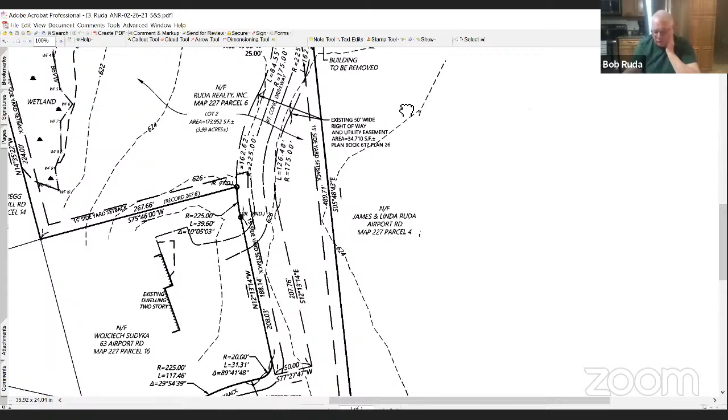Wasn't there some more property for the open space subdivision that would have been attached to this down at the lower bottom, Bill? Yeah, there's some adjoining land currently owned by my brother and his wife, and we have an agreement to transfer this into Legacy Landing if and when we get a purchase offer. Oh, okay, that's on the advice of our lawyer. He said don't make any moves until you're pretty sure it's gonna sell.

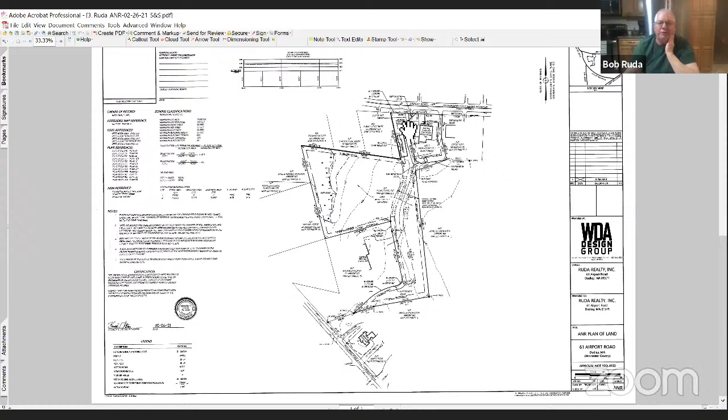Okay, where's the frontage for lot two? The frontage is, here Steve, about 100 feet. Next to, I'm sorry, three, Bill, how many feet are there? 73.02 plus 29.94 is 102 some odd feet.

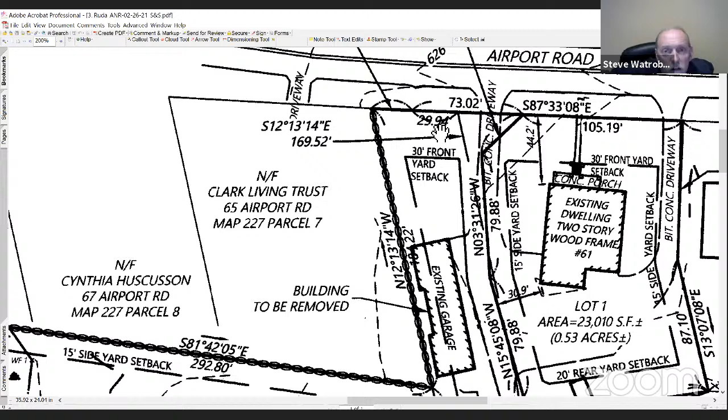Okay, and that's res 15 over there? It says on the plan, yes, I believe so. I had the same problem with that frontage. It's just the way the engineers put it, yes, res 15, you have to add the two. So it has 100 feet, which is the required minimum.

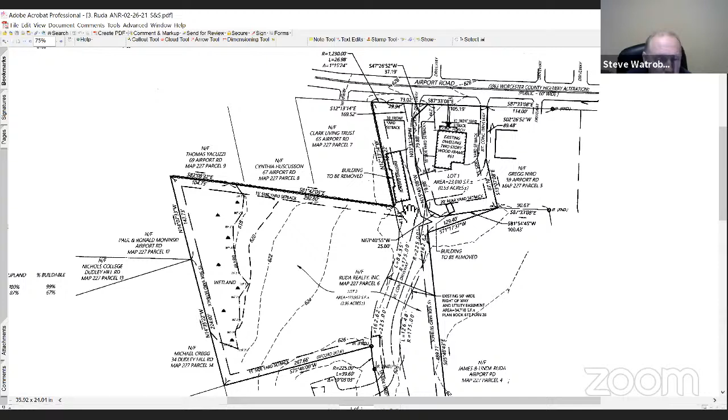So Steve, where that land is, where the existing garage is shown, if the subdivision ends up getting done, you're basically taking that garage down because the road's going to come right through there, right? That's correct. Okay, all right.

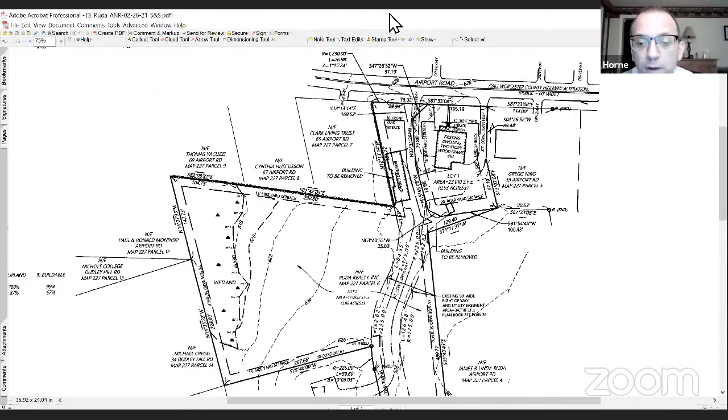If there are no further questions, can I get a motion to accept? Mr. Chairman, I'll make a motion that we accept the plan of land, ANR plan of land for it's Ruda Realty, Inc.

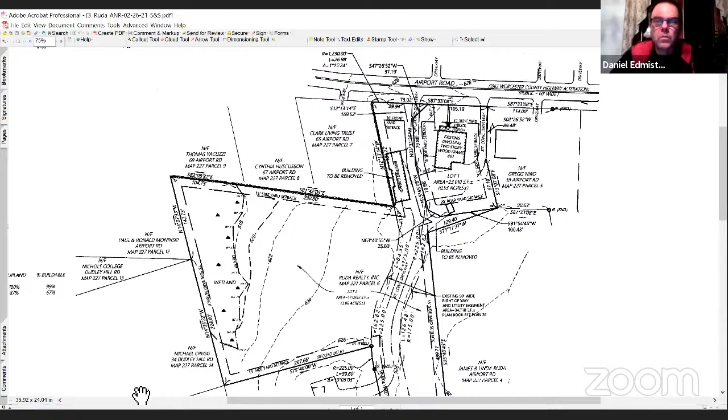All right, I have a motion to accept the ANR plan as shown from Ruda Realty, Inc. Do I have a second? Second. I have a motion and a second. All those in favor will do a roll call.

So 3 approved, 1 how do you say that? 1 is abstain. Abstention? Easy for you to say. It's too late for this stuff.

So Dan, all right, thank you so much. Michelle, leave the ANR Mylar and the copies in the police lobby for the board to come down and sign. And then when that's done, Michelle can notify Mr. Ruda that the plan is ready to be picked up.

I will. We only have to sign the Mylar. Is there something else we have to sign as well? 3 paper copies. Okay, we'll take care of that.

Who will be signing that, Bill? No, Richard. Michelle, will you put that in the lobby tomorrow? Absolutely. Okay, thank you. Thank you, ladies and gentlemen.

Yep, no problem. Thank you. Good night. Good night.

All right, moving right along. We have item B, discussion of the Complete Streets program. Is that on, do we have a guest for that as well?

There we go. Yes. Hi, Gemma. Hi, nice to be back. I have a PowerPoint to share if you're able to give me the opportunity to do that. Sure, one sec. And I also have 2 of my colleagues here, Robert Raymond and... oh, sorry. Okay, Gemma, you are now the host.

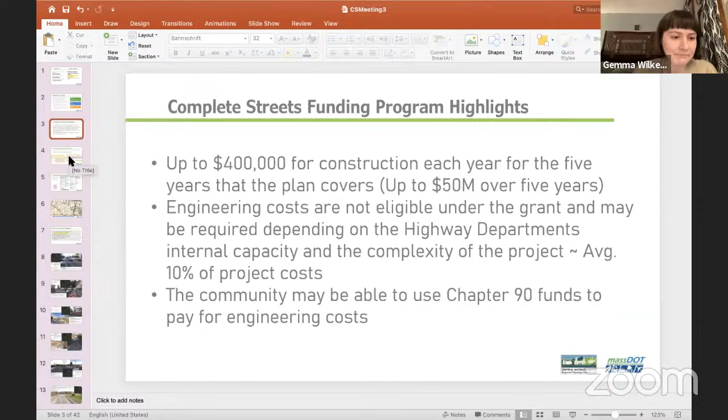You've ranked the project in terms of priority to the town. You've given it a name, a quick description, and this description can include things like 'if feasible,' right? So there might be some projects in town that you're not really sure about - you really do need to have an engineer look at it and understand what your options are.

What I'm thinking of in particular is that spot in front of the graveyard where you've got that really high elevation sidewalk. You can certainly include that in your plan and have that be something you'd like to improve as part of this grant, and it fits with what the grant can fund, but you might have to put it into your plan as 'if feasible, we'll do something like this.'

The next piece is the geography. You guys on your last meeting had talked about coming up with projects, and I guarantee you that those 5 projects will be broken down into many, many more, because breaking them down into smaller bite-sized pieces gives you more flexibility each year when you go to apply, so you can pull in the projects that make sense. Maybe you have some underground work or resurfacing going on, and you want to pair that with those Complete Streets projects - you'd be able to do that more easily by breaking the projects out a little bit.

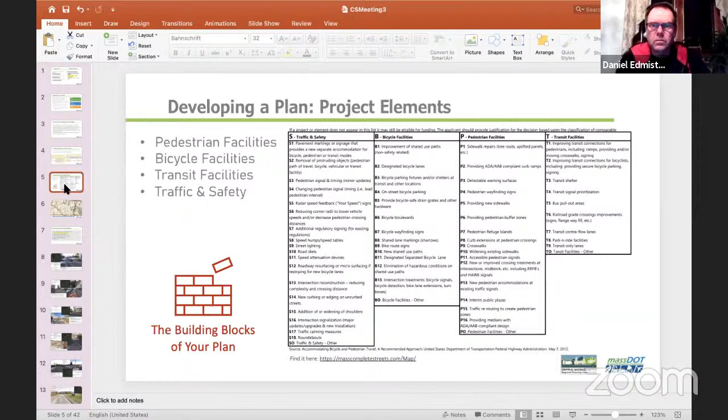So these were the areas that I focused on, 4 corners to the high school. And I believe this was the areas you had talked about in your last meeting. Does that match up with what you guys had in mind?

I would say so. The high school to Mason Road, 4 corners to the high school, 4 corners. I'm trying to figure out which of these would cover that area in front of the cemetery. I think that was one of our concerns. Is that the first one, 4 corners to the high school? So that's 4 corners at Center Road, Dudley Oxford Road, and Dudley Hill Road? Yes, exactly. Okay, all right.

So yeah, there's quite a lot of slides here. I'm going to just show you them, make a few remarks, and then give you some chance to talk about your thoughts.

So this is the first one, that's that intersection there. This is the section that I'm talking about as I walk you through. You can see the end of the sidewalk that's in front of Nichols College here in the green. There's one ramp there, which does have a detectable warning pad, so it's in pretty good condition. And then you've kind of got nothing.

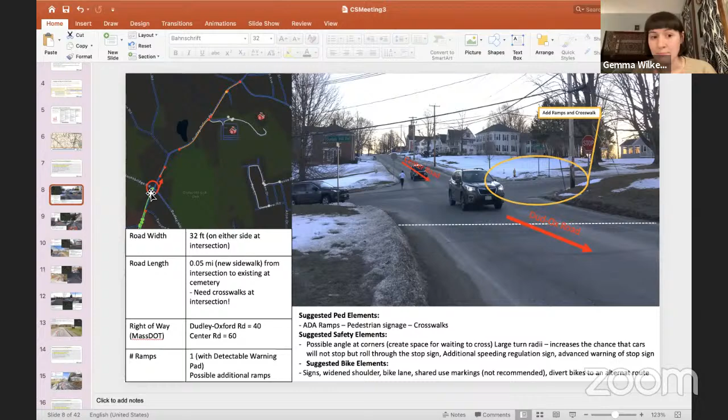And I think one of the things you would have to think about is where the crossing point would be. Because I'll just skip down to the graveyard, which is actually the next slide. So this is the graveyard, where there's this kind of problematic sidewalk here.

One of the things you could think about doing is actually getting rid of the sidewalk on the graveyard side altogether and moving it to the other side of the road. And it is a pretty narrow road there. So this is the right of way that MassDOT has on file, so there is some room to go into the right of way there. Anytime you go into the right of way, there's conversations you have to have with the community, and sometimes they're totally on board and sometimes not. So that's always something to consider whenever you do that.

But there might be an opportunity on the other side of the road here. Actually, I wish I had a little bit better of a picture. Oh, there you go. On the other side of the road there, to put a sidewalk instead of this side. So that kind of goes back to... If I may, I'm going to interrupt again, I apologize.

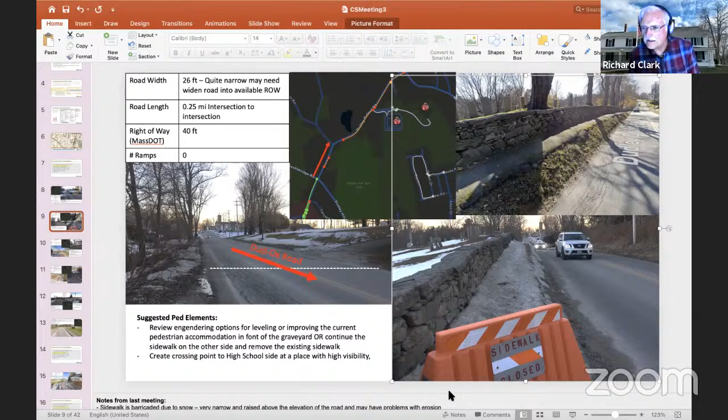I think it's fortunate that we have Michelle with us. As I understand it, Michelle, when the trees here were taken down, there was a plan to do something, hiring a landscape architect, and rehabilitating that area. Did that include the sidewalks? At this point, we spoke to a landscape architect who will be doing a plan of the cemetery only, not the sidewalk, just the cemetery and beyond the stone wall. So it does not include the sidewalk that I'm aware of, unless he's going to incorporate that. Given the fact that there's a cemetery with a number of graves, honestly, if anyone were looking to access it, having a sidewalk there seems like a reasonable thing to do.

So there's a couple of things to think about here. Do you want to work with an engineer to make the sidewalk work on the side where the graveyard is? Or do you want to work around that and put a sidewalk on the other side of the road? That's also a workable solution.

The other component is where the crossing point is. The sidewalk is on the Nichols College side here, and then it goes to the side of the road the high school is on. So at some point there needs to be a place where pedestrians can safely cross from one side to the other. If you have that crossing point at Four Corners, you'd have the sidewalk on the side with the graveyard. If the crossing point is further down, you could potentially have the sidewalk on the other side, away from the graveyard.

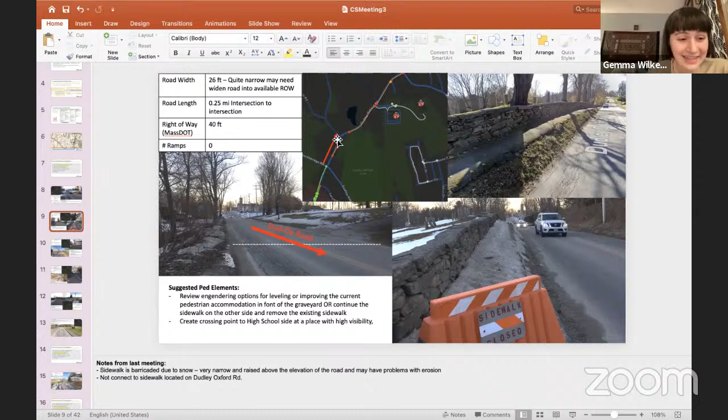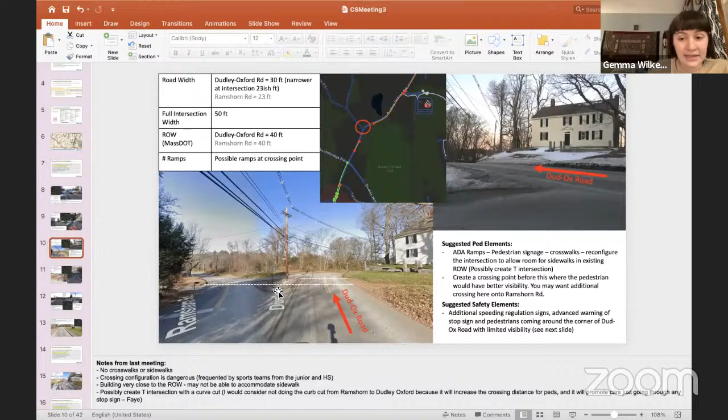What I wouldn't necessarily recommend—well, if you were to put a crossing point at this intersection here, the next one with that little island, you'd definitely want to think about visibility. Coming around that corner from the high school, this corner here, you go right into that intersection with pretty much no visibility until you're already in there.

But there is definitely a stop sign there—you have to come to a stop right there. Is it a three-way stop? Yeah, that's a three-way stop at that intersection.

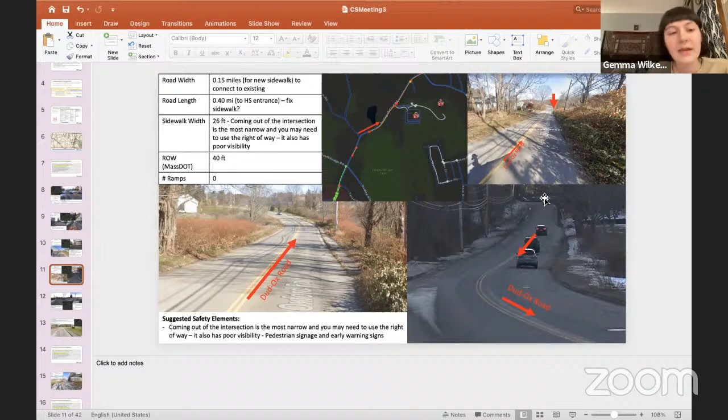I didn't notice that, sorry. But to Gemma's point, I think she's spot on—that intersection is funky, with some elevation issues, and visibility is restricted. The Four Corners intersection is much better visually for anybody driving, in terms of pedestrian crossing or attempting to cross.

I disagree with the idea of trying to fix that pathetic sidewalk in front of the cemetery. That photo she showed shows how narrow it is. I don't see how you widen that into a substantial sidewalk without undercutting into the stone wall, which I'm sure nobody wants messed with. That would be a major problem—that's why the elevation is so crazy the way it is now. It's because nobody wanted to dig down and destabilize the stone wall. Whereas on the other side of the street, there's nothing there.

The alternative then would be to leave it as is because it's too fragile to do anything with, or take it out completely, like she said. Take it out and do what—level it? No, seed it, let grass grow there. There's already vegetation growing down to the road right there, and that's falling apart anyway. Oh, it definitely is. I have a feeling if you talked to an engineer, they'd say there are some real erosion issues here.

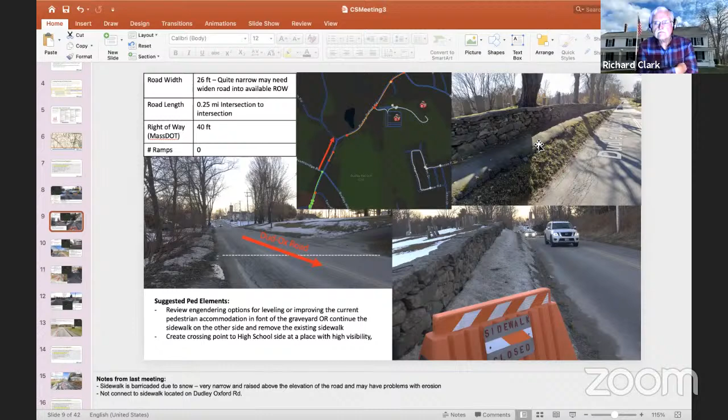So yes, I don't know if that is what you want to go with, if you want to kind of write it up in the plan as something that you would consider, the crossing point, and consider where you would place that sidewalk, depending on how likely it is to salvage this. Does that make the most sense to you guys? Okay, let me just go back because I clicked ahead a little bit and make sure I didn't miss anything.

The other thing I'll say about the crossing point is, you might not want to put it right at the corner there in front of the stop sign if you push the crossing point further down. You might want to put it a little bit further up than where I am here, so that you have a little bit more visibility of the cars coming around the corner. So that would be another thing to think about.

But the other thing with this piece of the road, this I would say is your biggest challenge in terms of connecting these pieces of sidewalk. And I know you had said the probable reason why they don't have sidewalk here is because the road is so very narrow. At this intersection, you have about 30 feet in width, and a little bit, 23 feet, at the narrowest point.

What I would think about with this intersection is that there's an opportunity to actually do a little bit of reconfiguring, because even though at this point you've got 23 feet, you've actually got about 50 feet all the way across here. So there might be an opportunity, for example, to turn this into a T-shaped intersection, or there might be an opportunity to narrow or reconfigure the structure of that island to be able to afford a sidewalk without even moving into the available right-of-way.

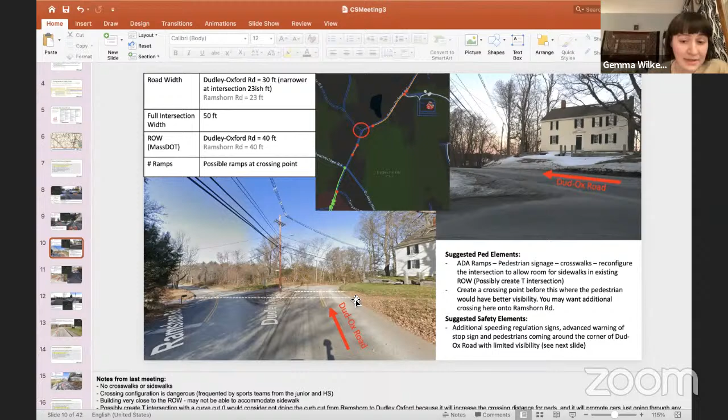So I'll show you the next piece there, because you guys had talked about this being the narrowest, but I actually think this next piece is even a little bit narrower. So up in this top corner here, it's a very small segment that gets quite narrow.

And just where this arrow is, you've got a sidewalk already, so everything from there and beyond would just be a sidewalk repair. The road gets quite wide as you move towards the school, but right here it's quite narrow. I'm not sure what this property is here, I couldn't really tell, it's the back of the golf course.

But on either side here, this would be a place you'd probably have to look at if you wanted to put a sidewalk in, expanding the width of the road into the available right-of-way. That's probably one spot you'd have to consider, given how narrow the road is. Although, you could work with an engineer and they might provide a bit more insight if there are other feasible options, but I'd imagine that would be tricky without going at least somewhat on either side into the available right-of-way.

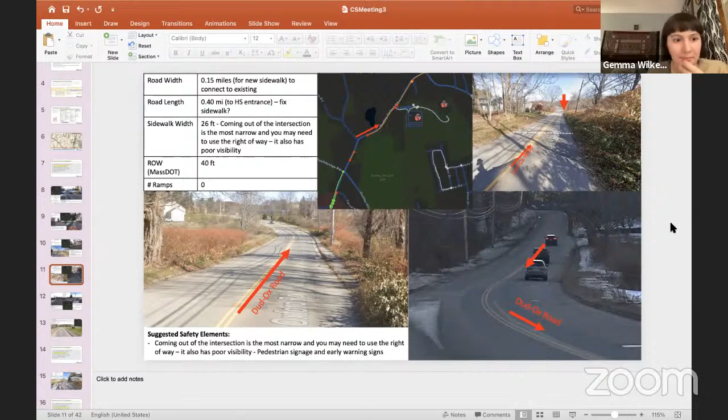A little further down the road, you can see how wide it's gotten here. You might even want to think, in places like this which are in a school zone, that these very wide roads are probably going to kind of encourage speeding. There might be opportunities to narrow the lanes here, improve things, even include a bike lane leading up to the school. If you're having kids funneling into the school, a little more amenities for bikes here, narrowing these lanes a bit, but ultimately the main thing would be to improve the sidewalk, make sure there's ramps where they're needed. So I wonder if there are any thoughts about this particular area.

I kind of like the idea in terms of the bike lane. Now, there are lights there as you approach the school entrance that flash during school hours, at dismissal or when kids are coming in, and I think it supposedly drops the speed limit down to 20. I don't think anybody, except in the mornings pre-pandemic when parents were dropping kids off, went through there at 20 miles an hour. But it was a pleasant thought in any event. Most people are going through at the continuation of the 40 or 35 they'll be approaching that area in.

It occurred to me that if we were able to widen the road, as you continue down coming towards Dudley, towards Charlton Street, and then Pierpont isn't too far down the road, you're coming into some of the more scenic areas in town. A bike path from Nichols going towards Oxford, taking a left perhaps towards Pierpont - one of the few scenic roads in town is Hadden Pond Road, up in that direction. If I were biking in Dudley and I weren't concerned about being run over by somebody doing 40 miles over the speed limit, that might be an area I would go. There are a couple of swans that have taken up residence in one of those ponds - it's an open area, part of the more scenic part of town. I suspect a bike lane might work there.

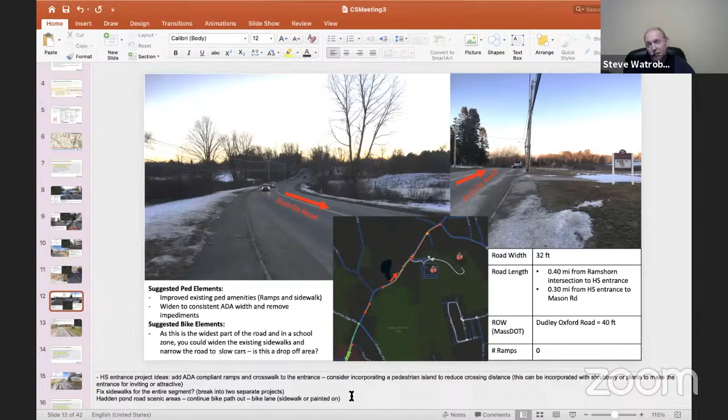So I don't think there's much here, but I did remember one thing. This is just at the school. One thing I would definitely look at is a crosswalk crossing over the entrance to the school and ramps on either side of that.

Another thing you could think about is putting a pedestrian refuge in the middle there. Basically you extend the island out and create a midway point, making it safer, especially for students, to cross one segment and then the other. But at minimum, you definitely want sidewalk improvements, a crosswalk, and ramps.

And then thinking about the bike path, you might want the bike path to continue up into the school as well, and maybe even some bike racks at the school or something like that.

Yep, that sounds good. Okay, beautiful. All right, so this is the next piece. Well, I'm not speaking for the whole board, I just want to make that clear. Oh sorry, I didn't mean to move on too quick, but if you don't hear feedback from the rest of us, just drive on. We're doing good.

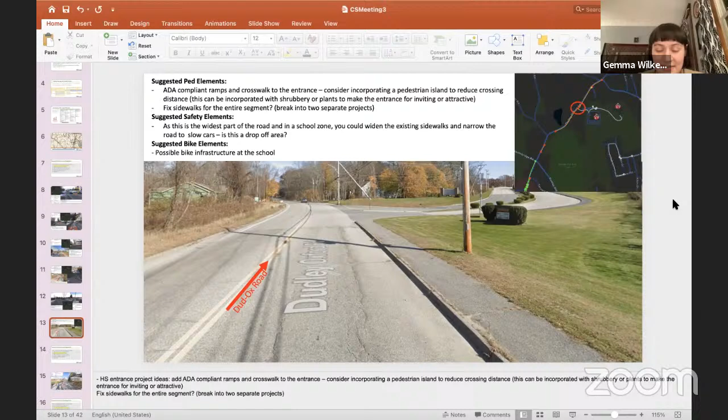Anything? Sorry, please slow me down if you need to. The next segment is the high school to Mason Road. It's a pretty small segment. There is sidewalk down the entirety of it.

The road is fairly wide on most of this. The sidewalk could use a little bit of an upgrade. I think there are 3 ramps that are currently not ramps that could have ADA ramps installed, which would make things a lot safer.

But there's not a whole lot here. I would say you could probably continue the bike path up this road. So right off the bat, I'd definitely do sidewalk improvements, ramps, and then potentially continue the bike lane up there — it looks like there'd be enough room to do that.

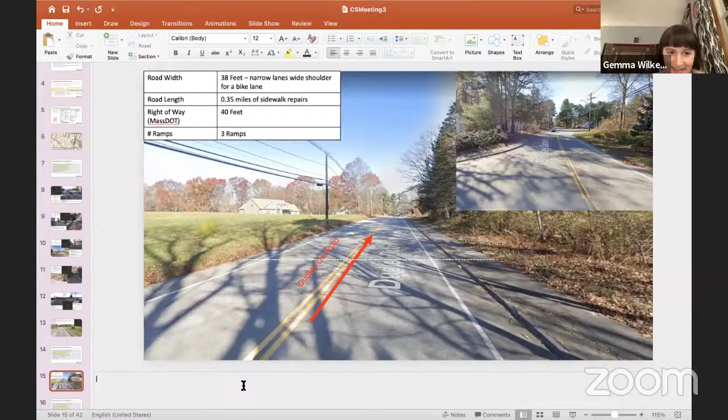All right, I'm hearing silence, so I'm thinking that sounds okay to all of you. I don't want to be the one to go 'oh yeah, sure, great' constantly. But yeah, the bike path — I was saying you've got to have it go somewhere.

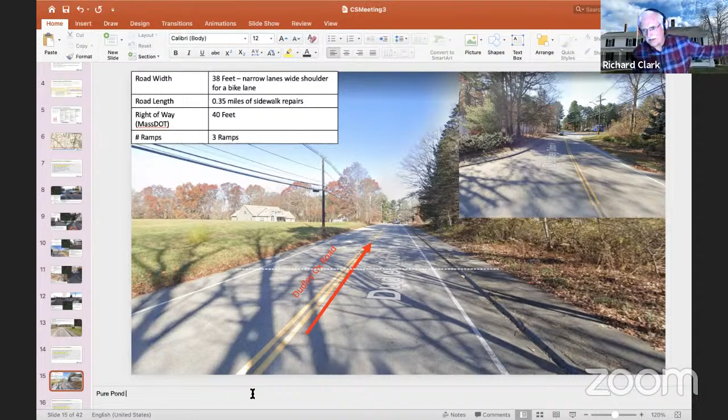Right, and I think Richard was mentioning that once you continue down this road, you start getting into that more scenic area with the ponds and everything, so it would be a great place to ride. Then further down, if you take the left, Pierpont is a very wide roadway, and that goes out toward another scenic road in town, Hadden Pond Road. You'd be maintaining something reasonably interesting for someone riding a bike, as opposed to just dodging traffic.

Would you be interested in adding that as a project element, including a potential bike lane going down? Did you say it was Pierpont Road? Pierpont is actually a conservation area on one side, about 3.5 acres. P-I-E-R-P-O-N-T, isn't it? Yes. There you go, exactly, Faye. Thank you — and that's a pretty straight stretch too, as a matter of fact.

Okay, so maybe I'll put that in as a project, but a little further down on your priority list — something you'd have in your arsenal. So that's all I had for that section.

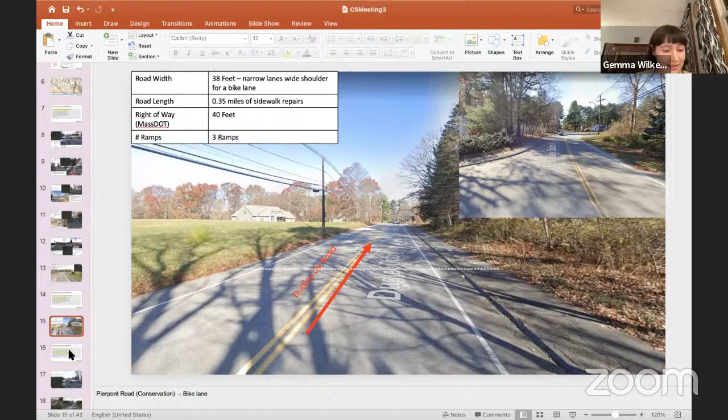It's pretty straightforward. The next section you talked about was Four Corners to the Park and Shop. Starting at Four Corners, similar to what we discussed: going down Dudley Hill Road, whichever side you decide to put the sidewalk on, you'd want a ramp as well as a crosswalk bringing you onto that side of the road.

If this was your crossing point, you'd probably have an L-shaped crosswalk with sidewalk going down this way and sidewalk going down that way, or a crosswalk going from here to here with sidewalk, and here to here with sidewalk. Trying to think if there's another configuration — I think there might be one other, but Gemma...

Could you back up to that list, the priority list, just for a second? Yeah.

I'm wondering from the board members, is anybody else thinking that number 4 should be moved to number 3, that those two should be flipped?

The reason why I say that is because I'm thinking about the number of houses you'd have the sidewalk go in front of. If you went from the end of Mason Road to Mason Road School, the population density down there is all Res 15. The houses are one right after the other. There aren't too many areas left on Mason Road where you have stretches without houses on at least one side of the road continuously, and in many cases both sides.

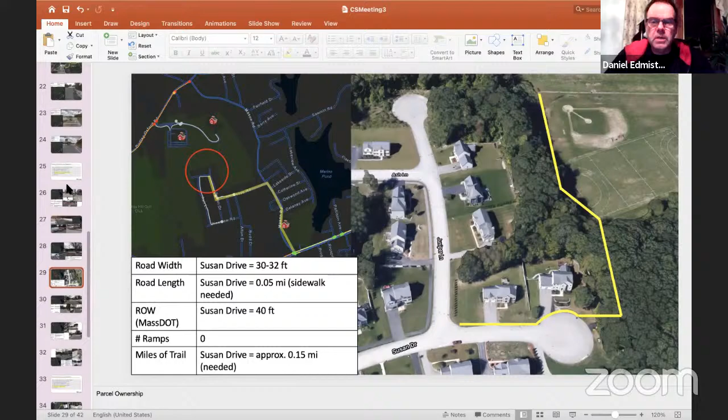But again, there's a lot going on here, and these would be good items to discuss with an engineer to try to figure out costs and what would be the easiest to do. We also have to think about time—if we can get good bang for the buck in the first couple of years, reaching a certain percentage of people, and then go from there, that might be a nice aspect of it.

But do we have a consensus with the board members as far as flipping 4 and 3 priority-wise? Well, I'm against it. I don't know what everybody else thinks—Guy, Richard, what do you guys think?

If I can make a quick suggestion, one thing you could possibly do is break this section down—I'm going to be breaking these sections into even smaller projects, right?

So this number 3 is going to be like 4 or 5 different smaller projects broken down. You could think of this as 2 sections: the upper part of Airport Road and the lower part of Airport Road. You could prioritize the lower part, from that path the students take to the park and ride, first. Then Mason Road Elementary School, and underneath that, the upper part, if that makes sense.

Dan, your opposition to the Mason Road, if I understand you correctly, is you just think it's too difficult to do because of how narrow it is in spots. Is that my understanding? No, my opposition is I just think Airport Road is, first of all, going to be easier. Second, it's going to be facilitating Nichols College to the park and ride. And third, it gets us more completed areas in a quicker period of time.

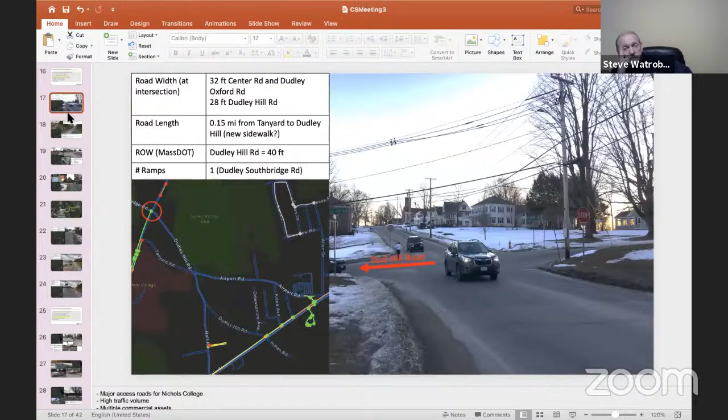All right, I just have to get resituated. Okay, this is probably the narrowest part, in the upper part of the road. You probably would have to go somewhat into the right of way here if you wanted to do a sidewalk there.

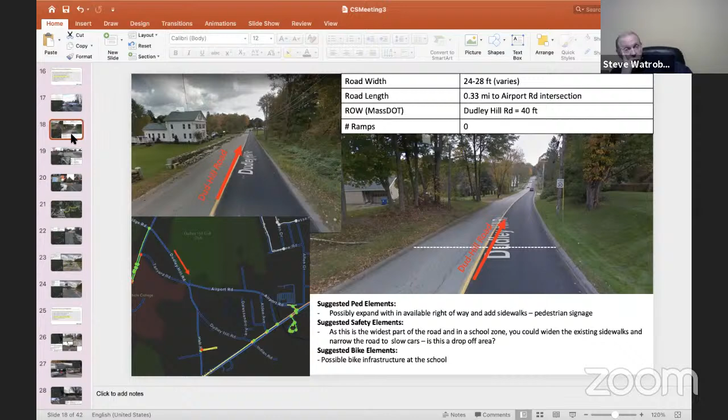And then this is that intersection, where things get a little interesting again, because you guys mentioned this is a pretty hazardous intersection. I definitely got that impression when I was out there walking around. This is where Nichols College students come out to walk to the parking lot, so there definitely are folks walking around here, based on the tracks in the snow and mud, which was helpful in some ways—we don't usually do this in the snow, but it was helpful.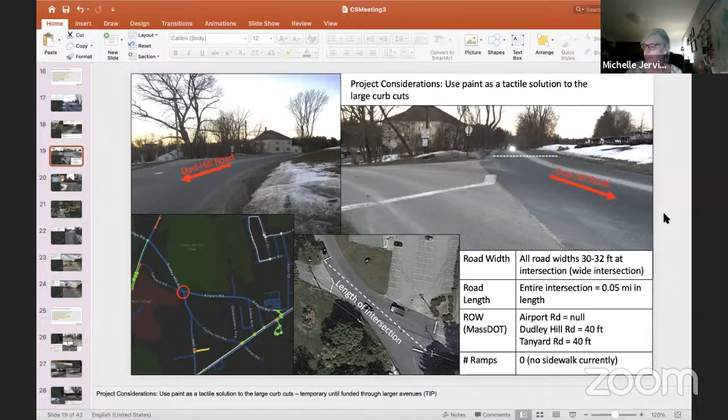One of what I would put in for a project element here is looking at the reconstruction: how can you reconstruct this intersection to be a little bit safer? So these are some of the ideas that me and Faye had talked about. Potentially there's a number of different ways you could think about reconfiguring this. The theme of the day is that you'd want to consult with your highway department or an engineer.

But one way that is kind of very common is to actually turn, instead of having this X shape, you turn it into sort of one road with two T-shaped intersections. So instead of having it be an X, you actually have a road with a sharp turn here. They'd have to stop and then turn onto the road as if it was a typical T-shaped intersection, and then another T-shaped intersection there. You could achieve that by basically bumping out this piece of land here.

A more affordable way of doing that, rather than actually creating a new segment of grass, might be to do something like this, where you're just using, especially in a place that's not right in your downtown, you're not necessarily needing to create these big pedestrian spaces to congregate. You're creating some kind of markings, and maybe using some more low-cost options to delineate that space. But basically looking at how you can reconfigure it, include some additional signage to make it a little bit safer, and also be able to fit the sidewalks in there. So any thoughts about that?

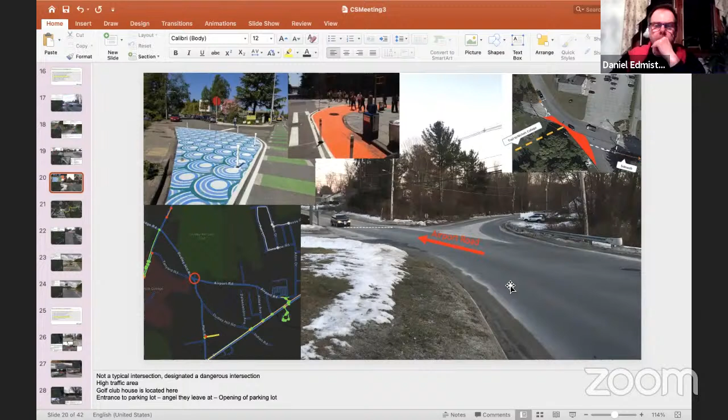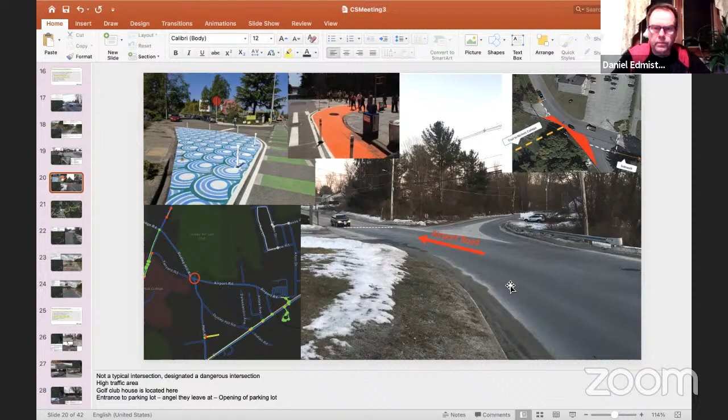One of the things is we had a town in North Brookfield, they had a grocery store that had two entrances. One was an in and one was an out, and they really wanted to swap which one was an in and which one was an out. That wasn't really something they could mandate, it's kind of something they need to work with the grocery store on. But we still included it in the plan, because it's kind of all-encompassing of what you think is ideal, and it's something you can work on when you eventually go to do that project. So I would say it's worthwhile to include in there that you would want to, if feasible, narrow that opening, and maybe add additional signage or something like that.

I wonder what you guys think about the idea of using these sort of more low-cost solutions to basically make it more clear to cars that they have to take a sharp corner, right? They can't just come around the corner, fly around the corner, but you're creating a T-shaped intersection. They actually really have to come to the corner and stop. It's not going to be the same as a T-shaped intersection on any other street, but using some of these more low-cost solutions to create that effect could provide some traffic calming.

I think it's a good idea. It's definitely low cost, and looks a little better than Jersey barriers. Yeah, anything that slows traffic down is good.

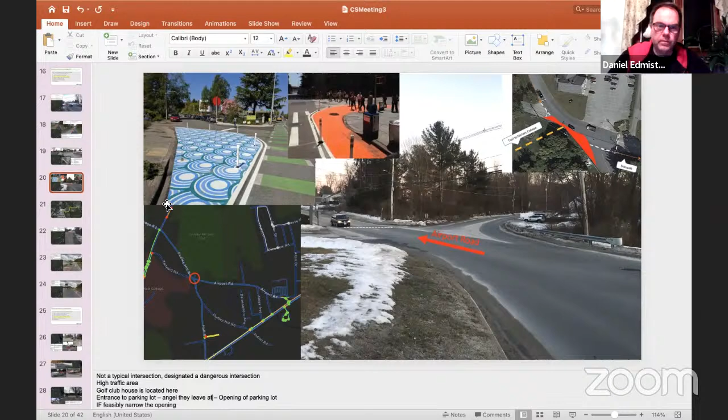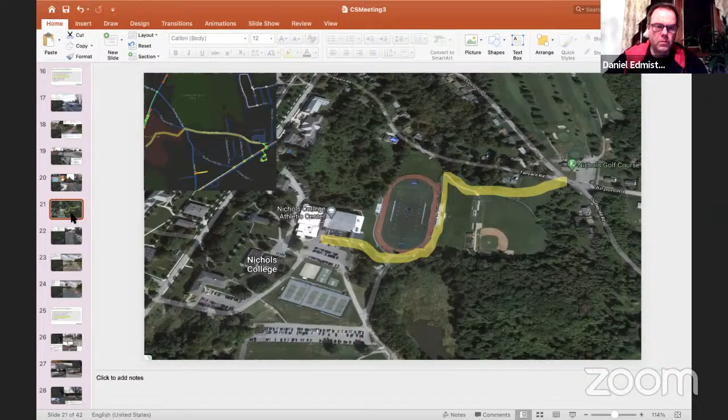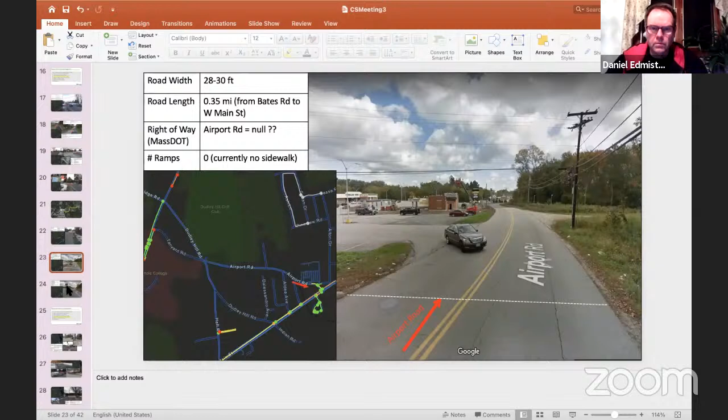We had talked about this already, kind of the two segments. There's this one, and then there's the one post where students come on. This is just continuing down, this road is a little bit wider. I definitely think there's the possibility to put in sidewalks here. That brings you to the park and shop. The sidewalks don't actually start until you get pretty far down here, where they bring you onto Main Street.

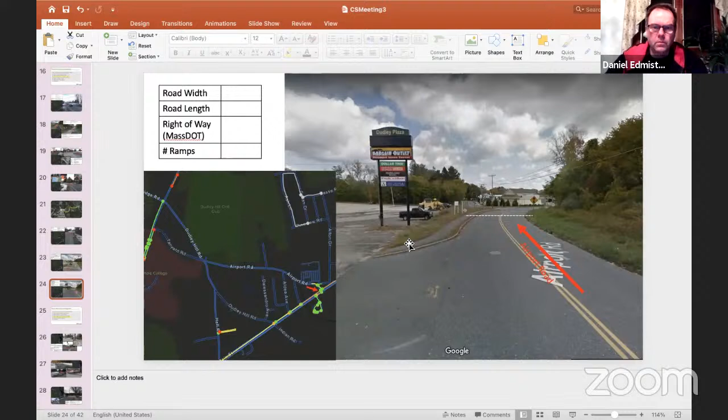So basically, ramps and things like that would be in that location.

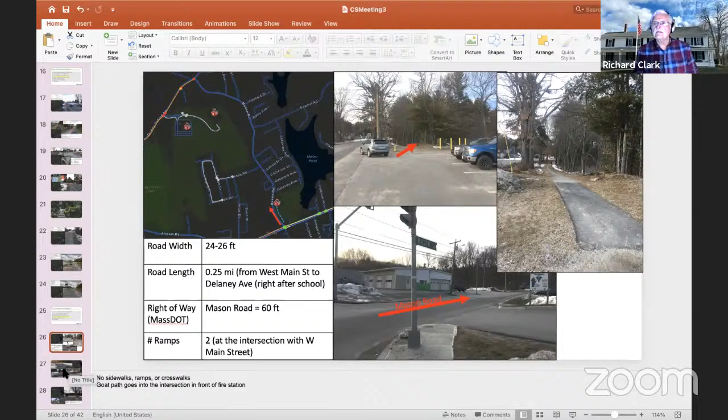Anything about this corner? Any thoughts? I think that makes a lot of sense, frankly, continuing where you have something in place now. As mentioned before, these segments aren't connected to anything, so making that connection seems almost like a no-brainer. And it's a very small segment, so it would be pretty low cost.

Then you get to the elementary school here, in front of the school. This is town owned, so you could add a sidewalk in front of there, and at least that would get kids all the way into the elementary school from Main Street. Then starting at this corner, at the stop sign, that's where you get into the very dense residential area with fairly narrow roads, so I think you all know it's tricky.

That school's the kindergarten, right? Is it kindergarten and first grade? It's been a while since my kids went there, so I don't remember. Does that include preschool? Yeah, preschool, kindergarten, and first grade. Gemma, you might want to keep that in mind, the locals call it Mason Road School, so they pretty much all know it by that name. If you continue to use elementary school, that's going to confuse people because the elementary school is actually on School Street in Dudley, nowhere near this area. Okay, that's good to know. So it's preschool, kindergarten, and first grade, you said? Correct, yeah.

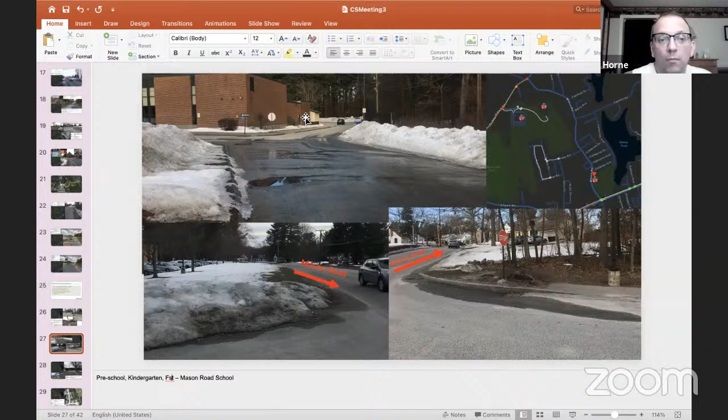The other thing with the sidewalks is they'd be doing double duty, especially the ones coming up from downtown, because the path to the beach is behind this school, and the parking for it is the school parking. I'll talk a little more about that later, but those sidewalks would be doing quite a lot of work.

This is just looking at the width of the road here. I would imagine there would at least be some places along this segment, it's a pretty small segment but very densely packed, with a lot of houses going from Jesse Road to where the school ends. That I think would be potentially tricky to fit a sidewalk in, but not impossible. You might have to think about going into the existing right of way in some places, though you might also be able to avoid that.

Is this 26 to 28 feet the narrowest? Yes, 26 is the narrowest. Okay, because we were talking about 23 feet in the first thing earlier this evening, where we were gonna get a sidewalk through. So I think if we could do it where there's 23 feet, we sure as hell can do it where there's 26 to 28 feet. Yeah, so the difference between them is whether you can put the sidewalk in where there's existing pavement, or whether you have to push into the land on either side.

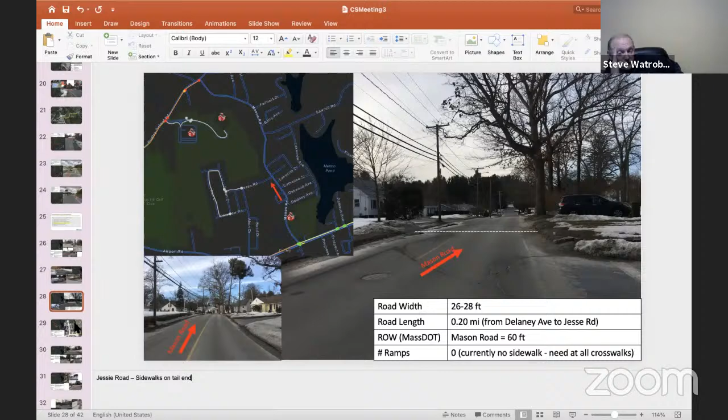Right. All right, so just to mention a little bit about this idea, I think this is a great, really low cost idea that makes a lot of sense.

The main caveat here is the ownership. So obviously, I believe this is a public road—or is this a private road here? It's public. Okay, so you've got public road here, and then you've got the town owned here. But there is the question of this little segment in between.

So there would need to be a discussion around the feasibility of that. If it's not town owned, you would probably have to fund that piece out of the town's budget—maybe you could get an easement or something like that and fund that small piece through the town's budget, then fund the rest through Complete Streets. So you'd have to think about that, and work with whoever the owner is. Just a heads up around that—I can definitely put it in the plan, but there would be a little bit more legwork on that one.

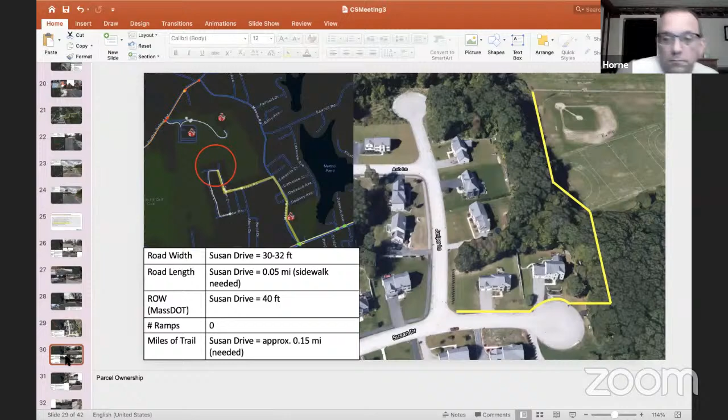I think this was just trying to show the road, the second half.

This is the part you might want to prioritize, this higher up section of Mason Road. As you go through applying for projects within the 5-year period, say you make this project work and create a path that connects here, then maybe you wait a little longer to apply for projects further up. Another thing to think about on this upper part of the road is weighing the idea of, instead of sidewalks, doing a wider shoulder with pedestrian signage, if you want to ensure residents funneling up to the high school and middle school, or down to Mason Road, have that kind of safety without going all in on sidewalks for a long chunk of road.

There would definitely be some cost, it would be a very expensive project. It would have to be broken up, maybe into two years of funding, applying for one half one year and the other half another year. So you might want to think about whether to scale it back with a wider shoulder, or put it lower on the priority list and focus on making something like this work on that upper half. Those are the kind of things to think about here.

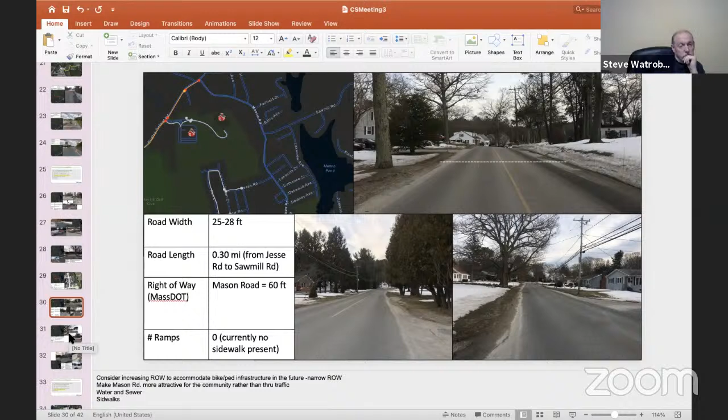You've done a lot of thinking here. I think this is great, and you want to bring in the public input as well. But also these are big projects, they're expensive projects. Complete Streets is going to help you a lot, but it's only going to get you so far. So there might be some other opportunities to make much more of a significant dent in all of this.

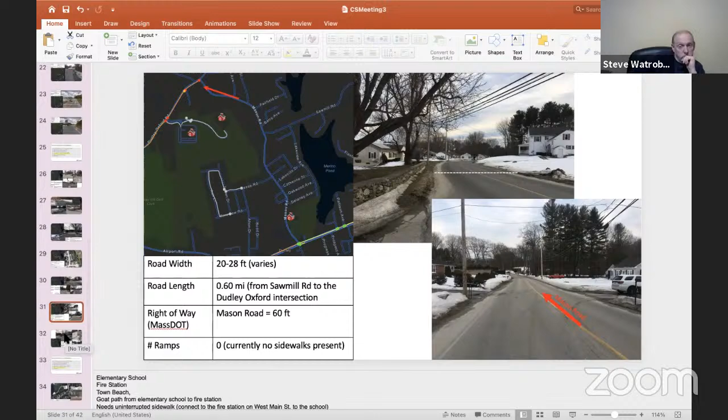Okay, so this is just, there's not a lot to say here. This is just looking at it further, I kind of broke this into two pieces just to recognize that there's a little bit, maybe some difference of width and things like that. But I think it's basically the same story as the last slide. And then you get back to where the sidewalk starts connecting to Dudley Oxford Road, which has a sidewalk that goes all the way to the high school.

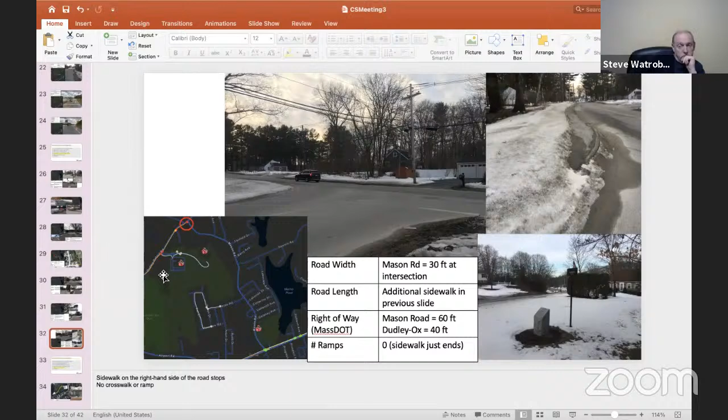All right, there's not a whole lot left to go, but the other thing you guys had talked about was the actual path. So right now there is not an entrance, right now there is a snow pile. But this is technically the entrance to the beach. This is the path here, and this is approximately the route that you would take to the town beach. So I would definitely recommend that you put this on there as one project. Paths like this are a bit more expensive, so if you were wanting to fund this, it might be sort of a one-year project that's funded. Although it's not that long, so it might not be quite as much as some of the other examples that I'll show you in a minute.

But yeah, this is pretty simple, pretty straightforward. You can put it on there as a project, a little bit lower down on the priority list potentially, that would be a shared use path that goes through here and just improve that. This is another place where you might want to think about other grant programs, maybe like a park grant or some kind of grant that you can do a little bit of work on this playground here or on the actual town beach, maybe an MVP action grant, something like that, to pair with the path, or even to fund the path itself. But certainly I think it's worthwhile to put on your plan as something that is part of that bigger vision of the things you see as worthwhile to be doing. Any thoughts on that in particular?

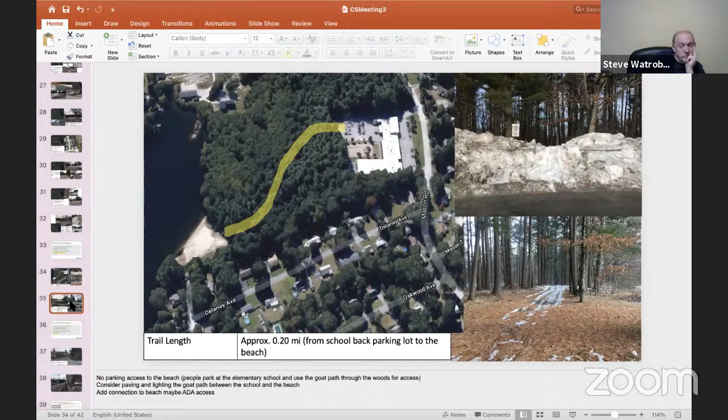The other piece of that is this road, I think it's Delaney Ave. This seemed like it wasn't a very highly trafficked road, but correct me if I'm wrong since I don't live here, just from being there taking photos. You could think about doing a wider shoulder there or some signage letting people know they can walk to the beach there.

There's a lot of no parking signs around here, and I would imagine there might have been some issues with the neighbors not wanting a bunch of parking coming down there. But you might think about putting in one or two handicap spots, and if you look at other grants that could fund work on the beach itself, having some ADA improvements there. So there's a couple little things you could think about with this road.

I wonder if anything there sparked any interest, or if there's any thoughts on this road in particular.

I know the police don't want people parking there, and I think you're absolutely right, it's the residents in those last couple of houses. They just don't want to deal with that. For the longest time that's pretty much been known. Occasionally people will still do it, but usually not for long periods. During the summer when things are in full swing, the police are pretty good about keeping that under control. So I don't really think you're going to be able to make the idea of a couple parking spaces fly there, but I might be wrong.

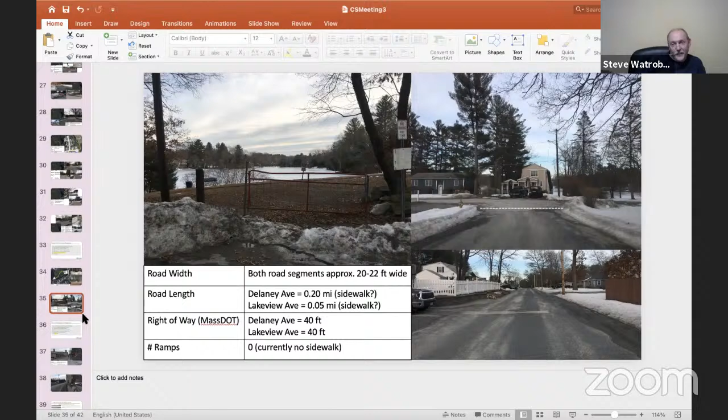Okay, I think I'm gonna move on to the next one, and anybody chime in if you want to go back. Oh goodness.

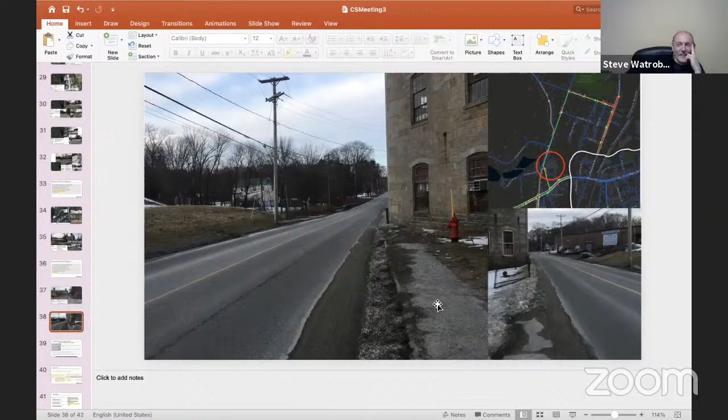I know this wasn't really discussed at the last meeting, but we had talked about it a little bit before. Because it was such a problem area, I wanted to go down there and take some photos. It is pretty incredible, you really feel unsafe. I was definitely feeling a little unsafe myself. You kind of have to pop your head around, and pop your head around again, and then make a run for it.

So I'd say you might want to put this as a project pretty low on your priority list, if it sounded like in your last meeting it wasn't really something you were super focused on. Only because it would be so difficult to fix. The more I thought about it, I just couldn't figure out how you would fix it. The truth is, I see a lot of people stepping out into the road coming around that corner. There's a lot of people using that sidewalk right there in front of that building.

And having to step out into the road and go around that corner of that building. A lot of people that live in those houses over there walking downtown to get groceries or whatever they're doing, or to the donut shop. I don't know where they're going, but I see a lot of people walking that route, and they all have to step out into the road around that corner of that building.

And how many, if I may, how many apartments are we going to be putting into that mill? Oh yeah, right, 200 or so. Good point, you got a better chance. The traffic you see right now is probably only a fraction of what is likely going to be there in the future. Gemma, could you back up to the photo right before that from the other direction?

This one? Yeah, you've got a better chance of convincing the mill developers to open up that window into a walkway, so you actually walk through the building and go out the window on the other side as another opening and continue the sidewalk. You get a better chance of that happening than fixing that intersection.

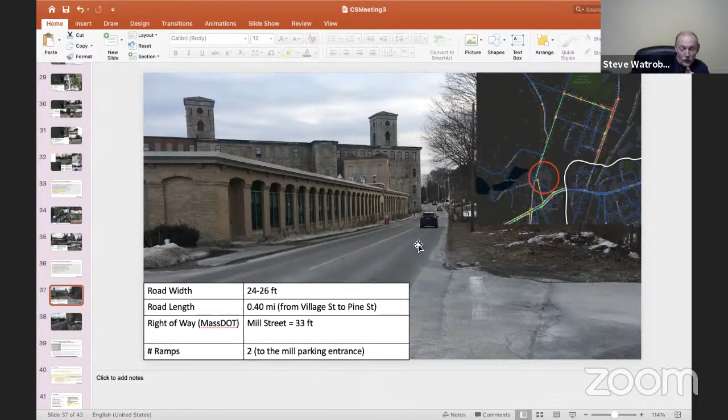If you locate the crosswalk, that first crosswalk down at the other end, if you locate it where you were talking about, it almost looks like people would have to step out from behind the building into the crosswalk. So I think with cars coming from the other direction, it would be dangerous to put a crosswalk in the area where that fire hydrant is going across there.

Not only that, but putting the sidewalk on the other side of the road, you've got a big problem. There's a stone wall there where the river goes under the road. And that stone wall is right up to the pavement, really close to the road. I don't think there's enough room there.

That's a good point. Yeah, I mean, I will not argue that this is not a tricky situation. And I will again bring up the point that there are very many places here where it would be great for an engineer to take a look, whether this project actually comes up as one that you want to apply for, or the highway department comes in and thinks about solutions with that. I don't know, it depends on how much you'd like to prioritize a solution here.

Rob, did you have anything to add here on what maybe some of their options might be, or do you think I covered it? I mean, I think you covered it. I know Ian had mentioned that the mill development is underway a little bit.

And I think sometimes if people are willing to work together, maybe they could do something to help out, throw some money at it themselves, because there's a big economic incentive for them. But beyond that, moving the road would cost an astronomical amount to shift the road over. So sometimes you just can't get a sidewalk in the best place. So this might just be one where, like you mentioned, bring it to the other side and hope for the best.

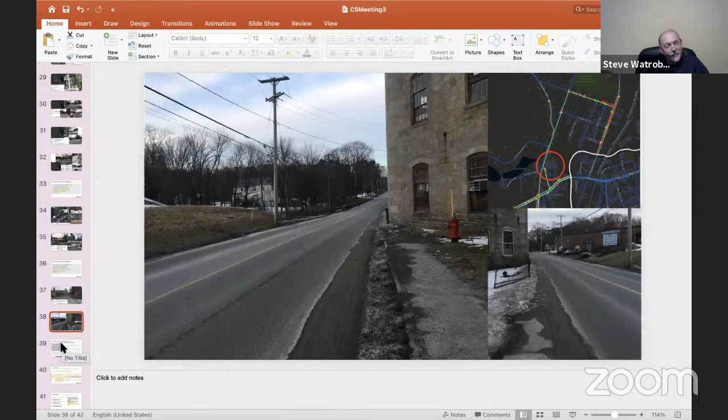You've got a lot of projects here, and I think that's good, right? You're thinking of this in a holistic, all-encompassing way. But realistically, how much could you actually apply for each year? And is there other grant programs you can use to supplement that? I'll talk about that a bit more at the next meeting. So yes, that's kind of all I've got to say.

Is there any last remarks, or would you guys want to schedule the next meeting to go over the plan for your next planning board meeting, or do you want another time in between? Is that workable for you?

Bill, how's our schedule looking in the next week or so, or the next meeting? Are we going to be pretty busy? No, Dan, we're pretty open at this point. Okay, what's the board's pleasure? What do you guys think, try to do it next time, keep on going with this? We've got some good momentum going.

Yeah, if we've got the time, because spring's around the corner and things might start getting busier. Okay, I would agree with that. That'll be the 24th then, right? Is two weeks enough time for you, Gemma? Yeah, I think it should be okay. I mean, I have a lot of information already compiled. The main thing is going to be trying to do the cost estimates.

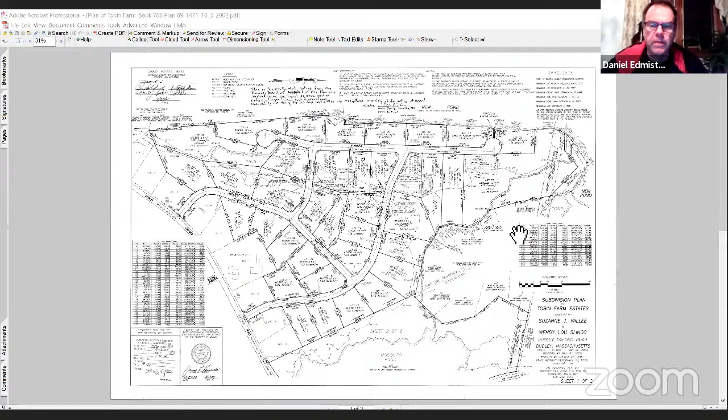Is that correct? Don had negotiated something with George Slingo on that. Let me see if I can find that memo. So on the Summer or Sumner Lane section, there are guardrails there where that crosses the wetlands. But then over on the end of Tobin Drive, where it goes down and crosses the wetlands, there are no guardrails there. So that's the only question I had.

Steve, was that on the Tobin Drive side? Is that as big of an embankment or less? I would say it's about the same. It's big enough - there's a big retaining wall that was built on both sides that was filled in with earth for the road to be able to go across there. So what you've got is the edge of the paved road ends, then some grass or vegetation for several feet, and then the drop off of that retaining wall.

And I would say if you're walking down Tobin Drive towards Stebbins, on the left side that's at least 6 feet, and on the right side, at the max it's probably about 8 feet down to the water.

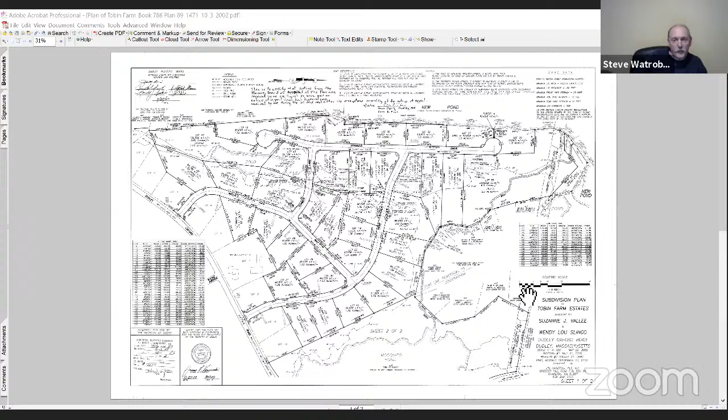Can you see it now? Yep.

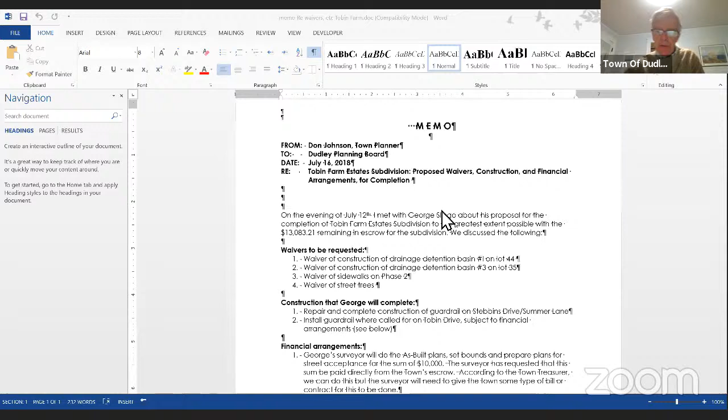So this was a memo that Don wrote to the planning board back in July of 2018 regarding arrangements for completion of the road after discussing it with George Slingo. It said construction that George will complete: one, repair and complete construction of guardrail on Stebbins Drive/Summer Lane, and to install guardrail where called for on Tobin Drive, subject to financial arrangements.

So that's kind of where it stood a couple of years ago. And I know George has been working on the guardrails. That's kind of why I wanted to see if he could come tonight just to discuss what the status of this is. But Steve, you're saying he hasn't completed that second guardrail?

Yeah, there are no guardrails on the section of Tobin Drive that crosses that wetland area. So again, what do you want to do then? Do you want to have George add that or not, I guess is the question.

I'd like to know what the other members of the board feel.

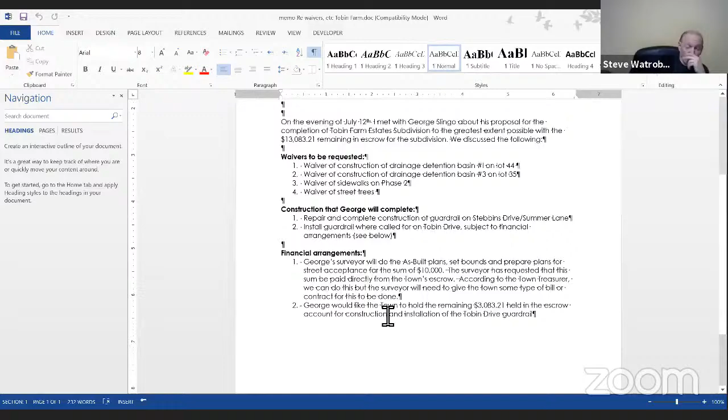Well, I would think if you got an 8-foot drop off, you need to have something. I mean, I will go back there and take a tape measure and measure the drop on both sides, because I'm making an estimate. I could be wrong, but let me put it to you this way - I wouldn't want to jump off of that wall from that height, not at my age anyways. And if it was a kid, I don't think they should be dropping off that height either.

But I'm a big believer that if it's on the plan, it should be built. Simple as that. But I know there was discussions before, this board obviously. That's exactly my point, Dan. I'm not clear on exactly why they haven't been done.

My thinking is, and it's unfortunate that he's not here tonight, did someone from the town say that didn't need to be done? Is he under the impression that it doesn't need to be done? If there was some kind of deal made that gave him that impression, then we need to know about it, because then we can just say, well, if somebody already said you didn't have to, then I don't think we should hold him to doing it.

On the other hand, if he just made the assumption that he didn't have to, well then I'm with Guy - we should hold him to what's on the plan. I think you could say you're with all of us in that case. I think that needs clarification at the very least.

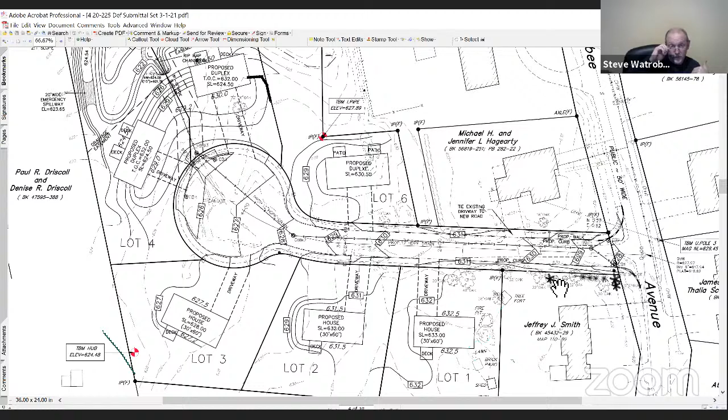But for some reason I thought I remembered reading that you could have the two-family in Res 15, but you had to build it so it appeared as a single family from the street. That usually is a condition for an accessory apartment, not a two-family house, but I'll double check, Steve. I don't recall seeing it. All right, but that's something to keep in mind.

If you look, he's got a duplex and a duplex - these are the three duplexes, and the three single-family homes are on the other side of the street. If you go over to Marshall Terrace off of Brandon Road, they bought the lot over there and are putting a duplex on it right now. It's probably going to be the same design, with the two garages in the middle and the two front doors on opposite sides of the house.

Oh, so sort of like that condo complex up there in West Dudley, near the vineyard, the road that goes up? Yeah, exactly like that. Okay, all right. I don't know if that satisfies the building inspector, but maybe there's not much issue.

The other thing is, over there at Marshall Terrace, is that Res 15 or Res 10? I think we changed it to Res 10. Oh okay, it was Res 15. The lot they bought was 12,000 square feet, but it wasn't buildable at 12,000 square feet. The woman who owned the land had enough property to give another 3,000 square feet, but she refused to do it - she kept fighting us.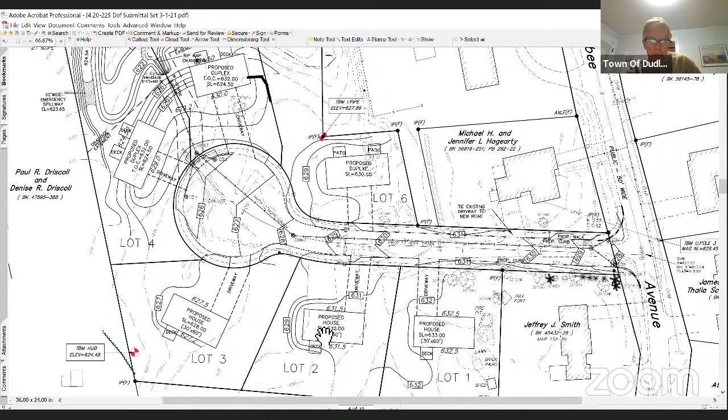Okay, so to bring this full circle, quick question Bill - the developer is not bound to give us a preliminary plan, but he did. But are we bound by the decisions we made during that process? No. Good, okay, well I wanted to hear that. You can look at it with fresh eyes if you want, but certainly you did review it previously, so something would have had to change for you to change your mind, I think.

All right, so we've got lots of good points that Richard and the rest of the team brought up that we need to discuss. Do I need to get a motion to accept the definitive plan, or is it just on the books? I would say I'd like the board to accept it as a submittal. Okay, and then how much time do we have for the review? Well, we have 65 days to hold a public hearing.

Okay, so I would say that with our next meeting being complete streets, we do not want to have a public hearing next time, correct? Well, I need to advertise - it takes a couple of weeks.

Try to get this sometime into April. Okay, and that would give us time next week to talk about this in more detail, possibly to ask if there's any need to get legal assistance as far as the duplex question is concerned. Sounds like it's by right, sounds like we don't have much to stand on there, but I do agree, this was never presented as such, and it's a little disappointing to find out this late that it kind of got, quote unquote, stuck in there.